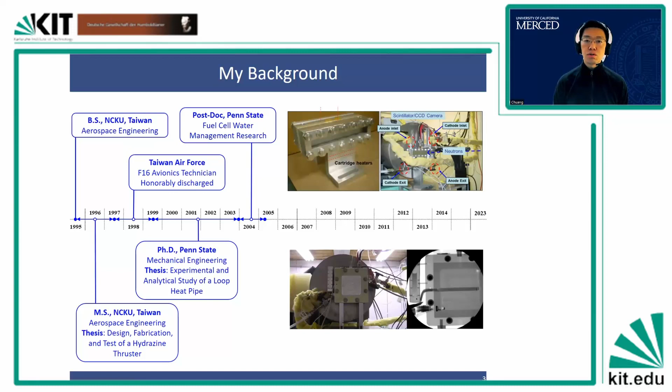On the bottom was with General Motors to study their fuel cell operation and to study their liquid water formation inside the metal casing, which is a single fuel cell. And so we started to understand that there are actually a lot of problems in fuel cell operation when it's related to two-phase flow.

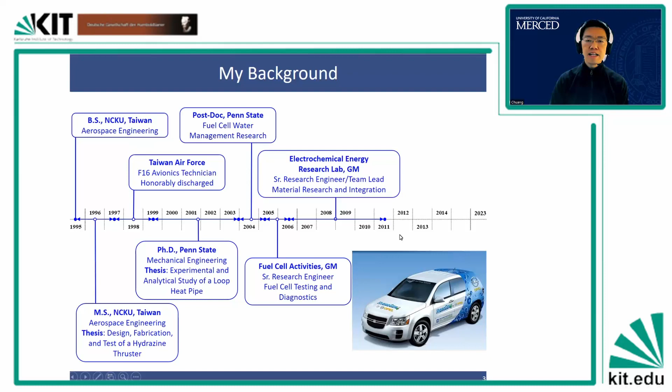So in 2004, 2005, I switched my career to General Motors. I started to work on the application or the research for fuel cell for cars, all the way until 2011. Then with that knowledge, with that foundation that I established, I switched gear to become a professor.

I first went back to Taiwan to be a professor for 1 year, and then came back to Purdue University before I finally joined UC Merced in 2014. So this is my 9th year here at UC Merced.

So I'm going to switch gears a little bit to start talking about hydrogen and fuel cells. I'm assuming some of you are in the area of fuel cell and electrochemistry research like Professor Zeis, but maybe not all of you are. So I structured today's talk with a bit of overview introduction, but also including a lot of in-depth technical content as well.

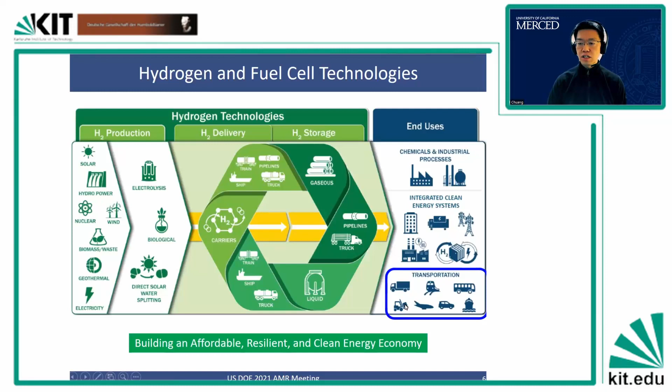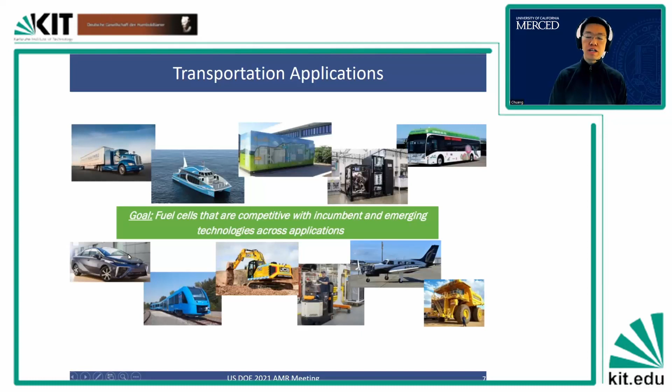During my time at General Motors, I was mostly focusing on passenger cars. Now I have a bit more focus on, for example, hydrogen trucks and other different applications. These are the different transportation tools we have, but my focus in my early years was mostly on passenger cars, and that's the application of the low temperature PEM fuel cell.

So I'm going to very briefly talk about these activities that I did with many of my colleagues at General Motors, really trying to develop fuel cell for passenger cars. If you take a look at this engine here, this is literally a fuel cell engine housing a fuel cell stack. It has zero emission, zero petroleum because we apply hydrogen, and hopefully this will be green hydrogen.

Compared to the internal combustion engine, it's much more efficient. There are fewer moving parts, also long range. It's very efficient, performance is very well, it can start under cold or hot operating conditions. It can be used for a small passenger car, can also be used for a large SUV or minivan. It has a lot of synergy with renewable energy sources. I have been working on this technology since 2003, 2004.

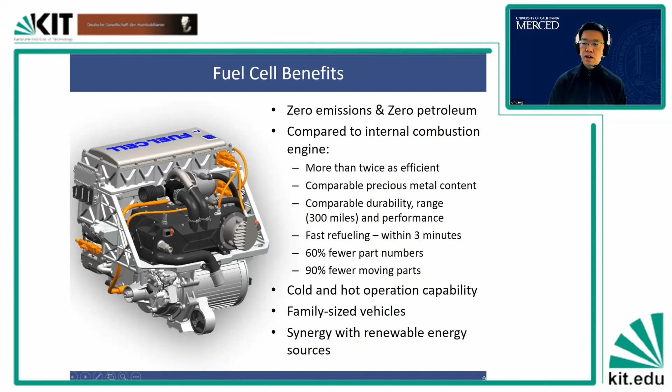When we apply a fuel cell in an automotive or transportation application, there are in general 4 different systems. The first system is related to the storage of hydrogen, referred to as the anode hydrogen storage system. The second system is the fuel cell stack, which is responsible for converting hydrogen into electricity. Through the process, because it produces heat, we need a radiator to continuously remove heat away from the fuel cell stack.

We also require an oxidizer. When hydrogen and oxygen combine, it generates heat and water along the process, and generates a lot of electricity to drive our power electronics for our powertrain. So this overall propulsion system can be used for passenger cars, trucks, and different types of transportation tools.

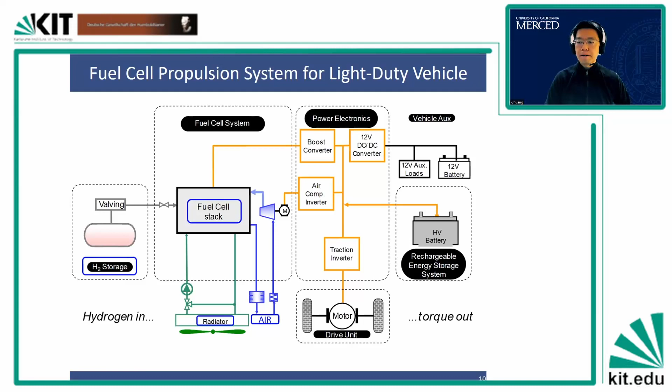A very general and quick introduction of a fuel cell, or low temperature PEM fuel cell. You have the cathode side, which is responsible for the reduction reaction, referred to as oxygen reduction. Oxygen combines with proton and electron to produce water. Later in my talk, I'll discuss why water is actually critical in this situation.

On the anode side is where hydrogen is split into protons and electrons. Through this carefully designed electrochemical process, we are able to generate electricity. We use this electricity to power cars and different applications. And so there are different components inside.

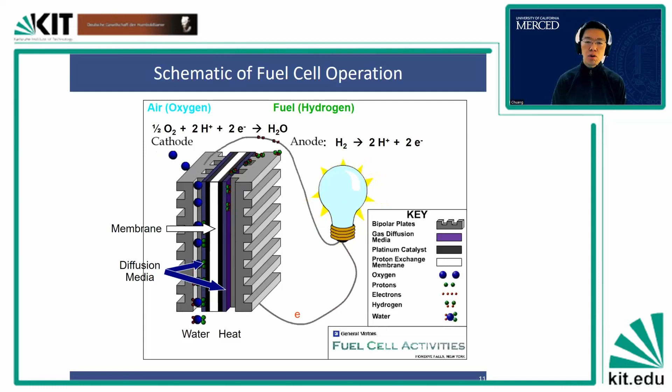Besides the flow, you can see the flow channel guiding the oxygen or air flow on the cathode side, and the hydrogen flow on the anode side. Within the cell, there are what we refer to as soft goods, which include membrane, electrode, and gas diffusion media. I'll blow them up to show you what they look like here.

If you look inside the center of this fuel cell, on the right-hand side is your anode side where hydrogen comes in, diffuses through the gas diffusion layer, and has hydrogen oxidation reaction at the catalyst layer. The proton then moves through the membrane and combines with oxygen to generate water.

What's interesting is if you take a look at this, I show this as a fuel cell transport study. As Professor Zeis was saying, a lot of my interest was related to transport phenomena, phase change, two-phase transport flow. If you look at this figure, there are many complicated physics: proton transport, electron transport, hydrogen and oxygen gas transport. Then, because fuel cells generate heat, there's heat transport together.

In order to have very good performance, one key component is to be able to compress the cell, so you enable electron transport through different layers. Later on, we are going to talk about how important these transport phenomena are for optimizing fuel cell operation or fuel cell durability.

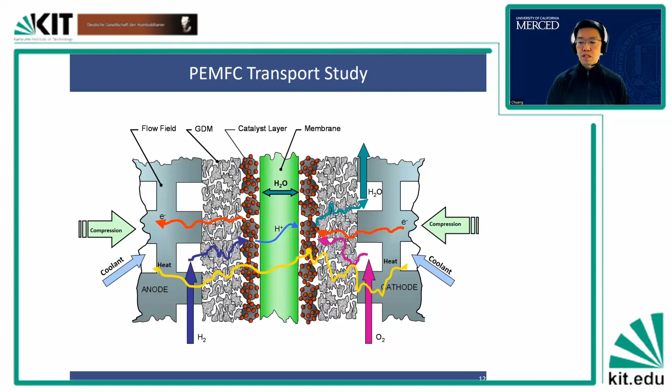My first project at General Motors was to study transport media, because of my background in two-phase transport in media using neutron radiography. When I first started at General Motors, I was given the task to study the gas diffusion layer, which stands for GDL, and the microporous layer, which stands for MPL.

I use this to show you the multi-scale transport nature, because the gas diffusion layer is actually made of carbon fibers, with a carbon fiber size of about 7 to 10 microns each. When you stack them together, the pore size is about 200 microns.

If you take a look at this microporous layer, which is a layer on top of the gas diffusion layer, it consists of carbon particles mixed with hydrophobic agents like PTFE. There are large cracks on top of it, but the pore structure within these carbon particles is roughly about 50 nanometers.

My first task at General Motors was to study these materials and how we could optimize them to enhance either performance or durability, or to remove issues with generated liquid water. The first step I did was look into the process, design, and material of this baseline material, referred to as diffusion media.

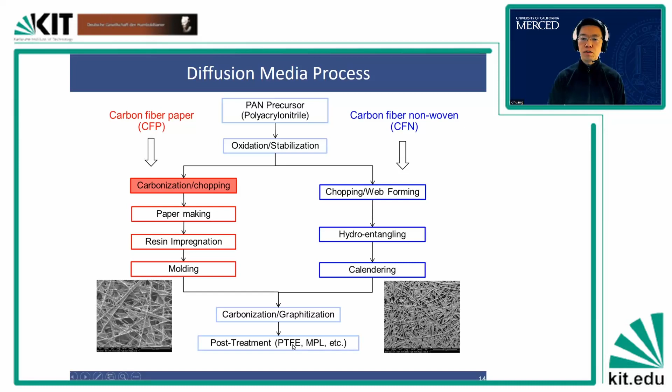After this, there is usually graphitization or carbonization to enhance transport properties, and post-treatment for microporous layer coating or other forms of coating. While at General Motors, together with my colleagues, we developed different tools to characterize the properties of the gas diffusion layer.

One area was to study electrical transport, both in-plane and through-plane. Then there's thermal transport, again both in-plane and through-plane. We were able to put together a thermal transport model to predict temperature within a fuel cell. We also developed tools to characterize gas transport for hydrogen and oxygen transport, including a tool called limiting current, which I'll introduce later, a diagnostic tool to characterize the features of hydrogen and oxygen transport within a fuel cell.

Last but not least is mechanical transport. As I said, the fuel cell requires strong compression to keep all the cells in good contact and to transport heat and electricity away from the cell. So the mechanical property of the diffusion media, which acts as a spring inside the cell, is extremely critical. We developed tools and methods to study the bending, compressibility, and shear modulus of the gas diffusion media, and developed models to predict what the deformation looks like inside the fuel cell when compressed. Those tools were developed with my colleagues at General Motors.

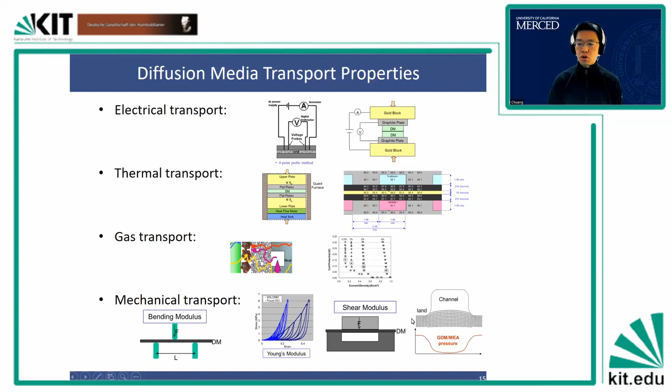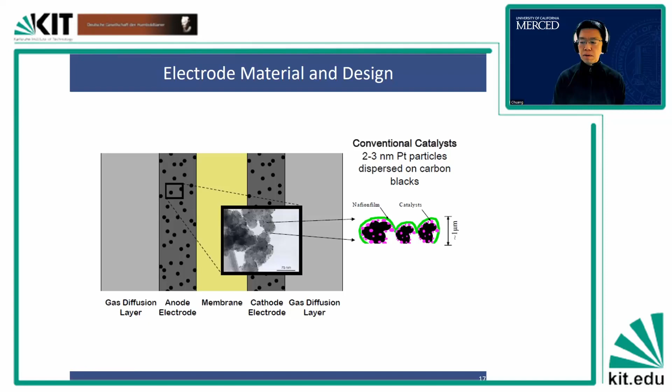Along the process, I talk about models and being able to predict transport effects. I also was involved with fuel cell models that predict fuel cell performance inside a cell. This is referred to as a 1D down-the-channel model, which is a great tool that captures the physics. I'll talk a little more about this in later slides.

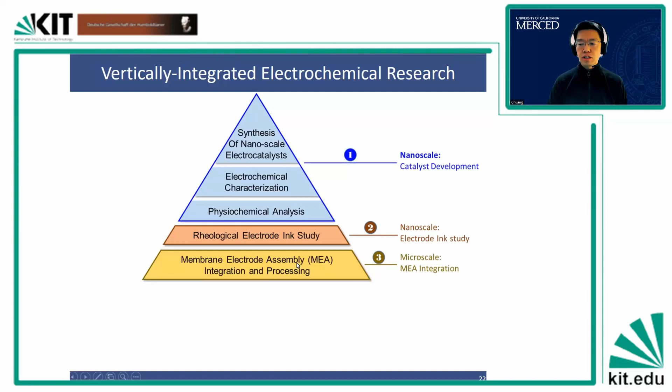The last but not least scale relates to full cell testing, characterization, and simulation. So these are four different vertically integrated research scales. You can see that from level 1 to level 4, it goes from nanometer scale all the way up to millimeter scale. If you consider the scale of the channel and the stack, it can actually go up to centimeter or meter scale.

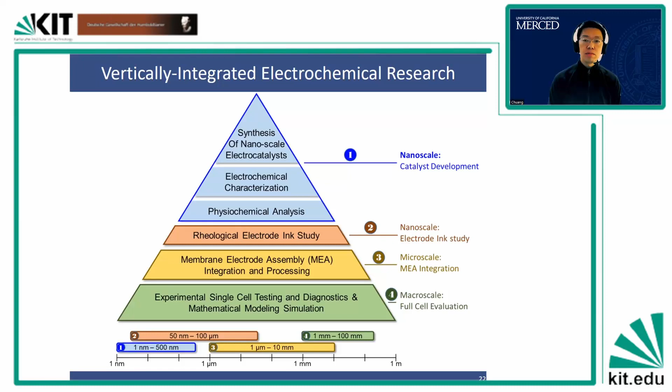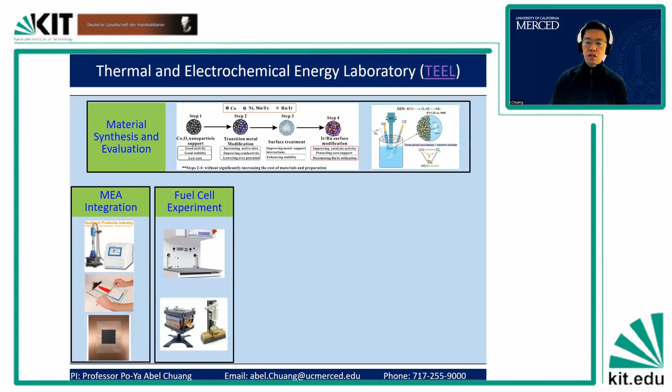Within this strategic plan, I structured the lab activities around these focuses: first, material synthesis; second, material integration or MEA integration; third, fuel cell experiments; fourth, fuel cell diagnostics; fifth, fuel cell modeling; and lastly, system integration. We don't do system integration ourselves at UC Merced, but rather collaborate with suppliers and vendors on that. Our research mainly focuses on the first five areas.

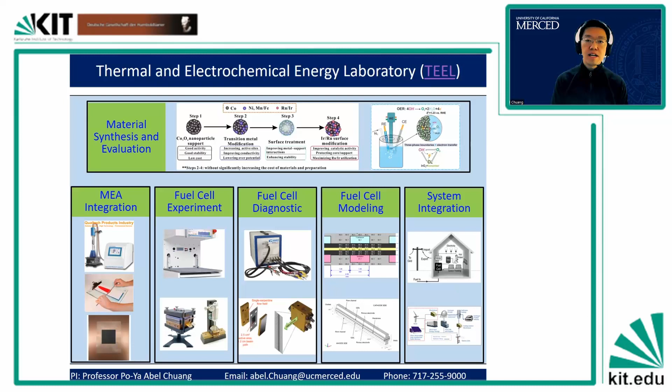Material synthesis, integration of catalyst layer or MEA, performing fuel cell experiments and diagnostics, and then based on those results, developing fundamental understanding through fuel cell modeling. In the next ten slides, I'll introduce each area very briefly, without going into too much detail since these are relatively broad research topics. I just want to give you an idea of what we're doing in the lab, so we can have follow-up discussion to dig deeper into each area.

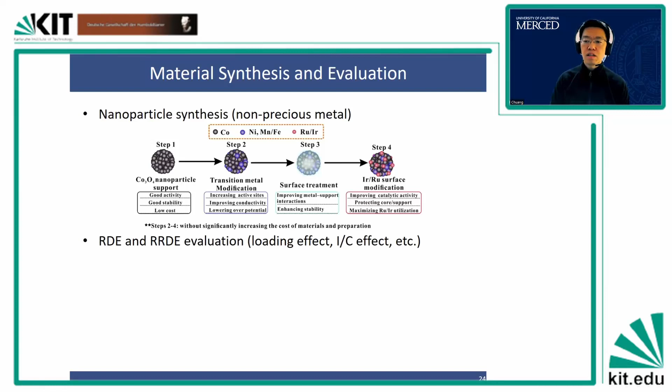The first step is making nanoparticles, synthesizing different catalysts through different reactions or activities. We have different tools for making them: hydrothermal tools, flux tools, and atom fusion tools, which let us make materials depending on their properties or on the precursor.

After that, we perform RDE or RRDE evaluation to understand their fundamental intrinsic properties related to the Tafel slope and specific activity of the material, through cyclic voltammetry, impedance measurement, or linear sweep voltammetry analysis. This is an illustration of a three-electrode system.

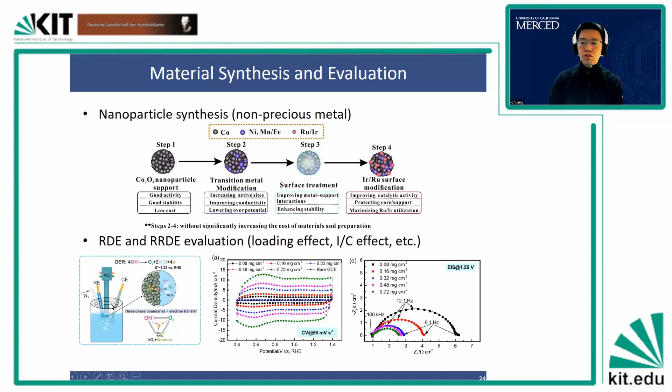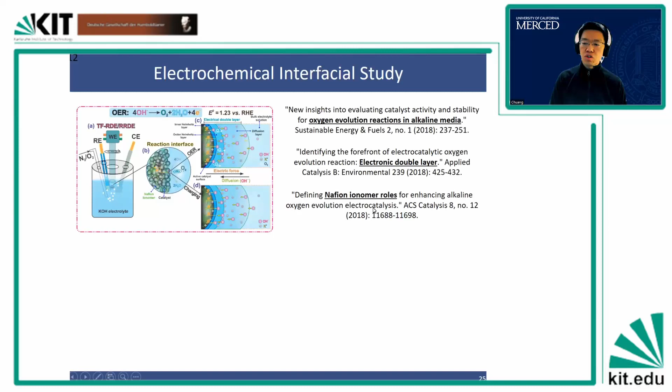Through this process, we were able to do quite a bit of fundamental research. We applied the study to catalysts for oxygen evolution reaction in alkaline media, and also in acidic media, studying the role of Nafion and its interaction. We also applied these tools to nickel carbon-based materials to study urea oxidation reaction and catalytic activity.

We will continue to work in this area to develop catalysts through different types of electrochemical research. The second area relates to MEA design, processing, and integration. As I explained earlier, this continues from my activities at General Motors on how to integrate catalysts and make a highly efficient membrane electrode assembly.

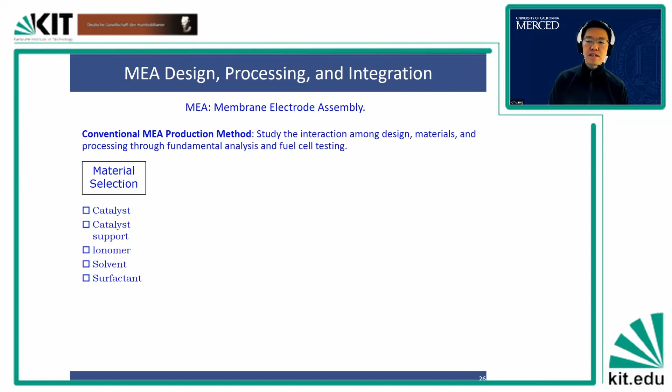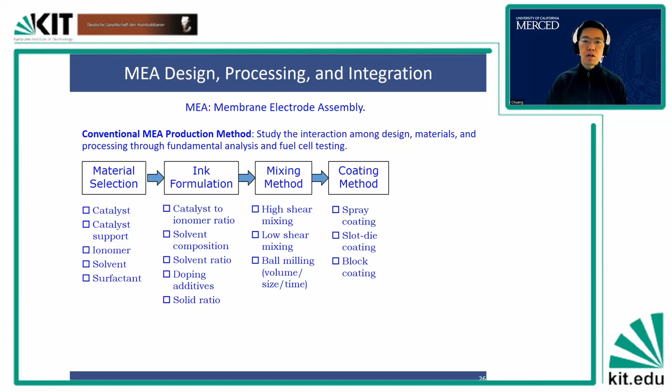The process starts from selecting materials and then making an ink—coming up with different ink recipes, mixing the ink homogeneously, and then applying the ink through thin film coating, either onto a decal or onto a gas diffusion layer.

And through those, we were able to integrate them through different architectures. I explained to you earlier that we can either make this as a CCM or a CCDM architecture. They have different advantages and disadvantages within different architecture.

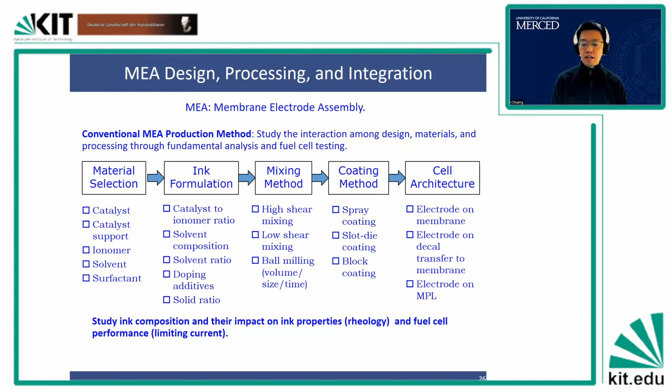Some of this work, as you can see here, is very interesting but very developmental. So besides some fundamental work, we also did this developmental ink optimization process. But instead of just trial and error, we wanted to study the ink to understand its properties and how the final microstructure of the catalyst layer looks. Through that, we employ this ink mixing and coating process, demonstrated here, referred to as the membrane electrode assembly integration.

We can do this with decal transfer, or we can also coat a GDE through the hot press process, different processes that we integrate. With that, we were able to test a full fuel cell to diagnose the properties and performance of a fuel cell.

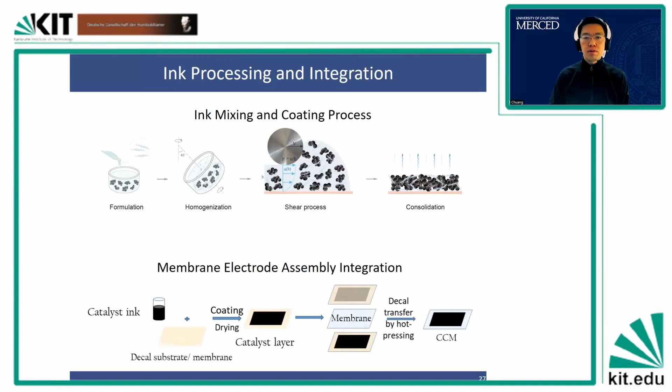But as I said, instead of just doing trial and error, we make a recipe, then we make the MEA, we test the MEA. Instead of going from trial and error, making one and testing to know if it's good or bad, we actually employ the tool called rheology.

So we study the rheological behavior of the catalyst ink to understand when it is under shear or before shear, what does the microstructure look like?

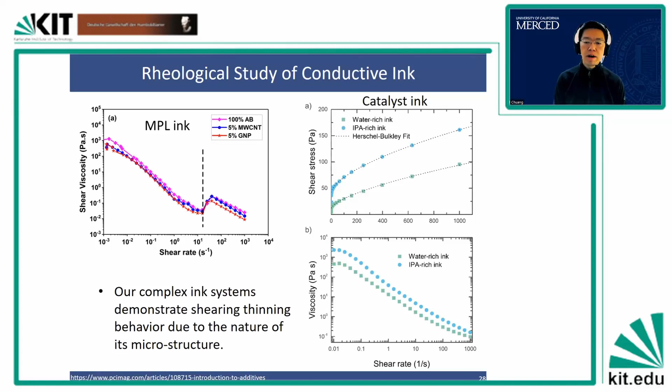But to understand the microstructure a little bit more, we also study this dynamic measurement. Within this dynamic measurement, we have different shear steps, a 3-step process called three-interval thixotropy test.

First step is low shear, then you shear at a very high shear rate, and the viscosity will drop. After that, we let the viscosity recover itself to understand the time-dependent measurement behavior.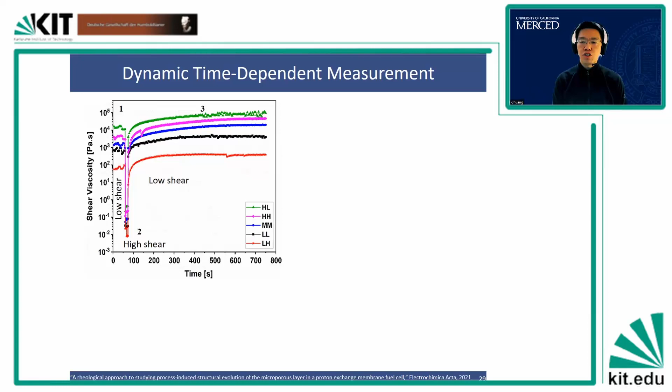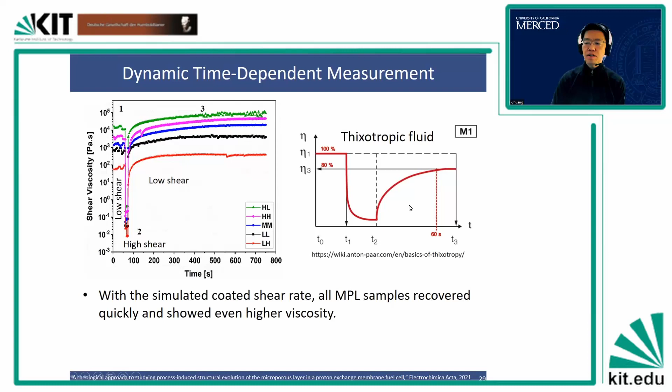With this 3-phase rebuild, we were able to study whether the ink actually has thixotropic behavior, or whether this ink on the left exhibits rheopectic behavior. Through the study, we were able to propose different microstructures, in this case, for the microporous layer, looking at what happened before the intact structure, before shear, and during the shear process.

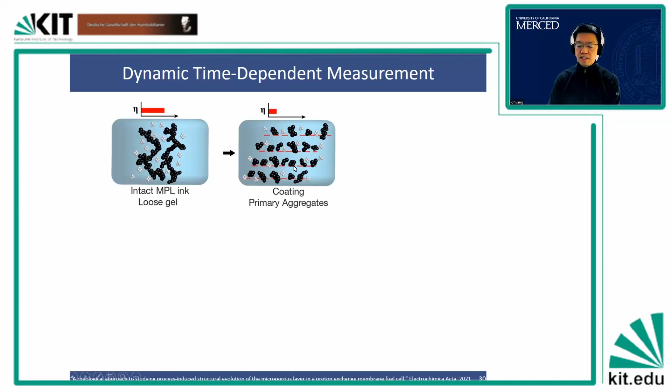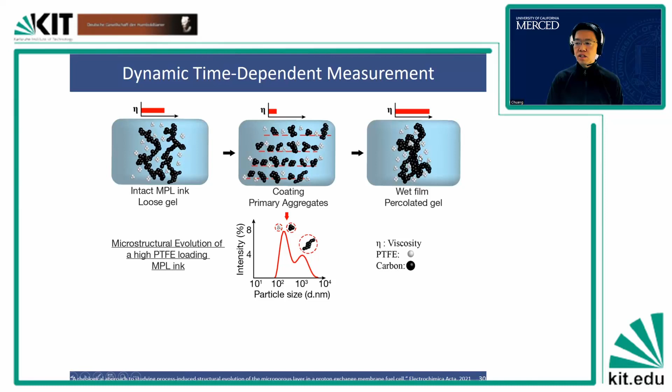Through the process, we also investigate the primary particles to understand their particle size distribution. At the end, after they recover, they actually develop a stronger structural behavior compared to the original behavior.

So this rheological study was able to help us understand potentially what the microstructure of these primary particles looks like.

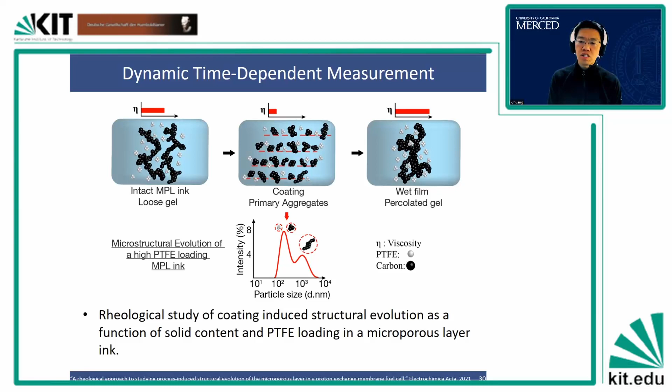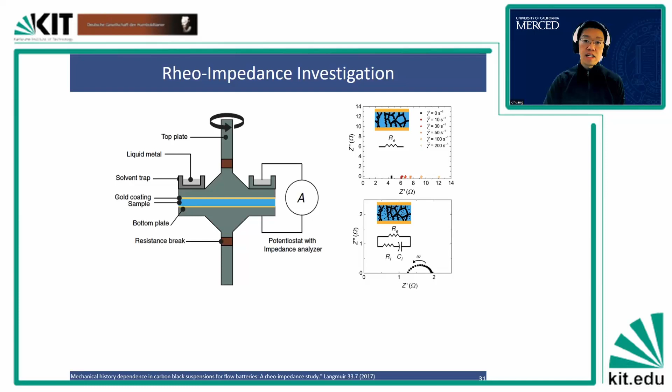Recently, we expanded this study to not only study rheology, but also study impedance in situ or simultaneously. We developed and modified our tools to implement this rheo-impedance investigation to study the ink, because we know all of our ink has ionic conductivity and also electrical conductivity. Through this study, our goal is to understand what the electrical conductive microstructure looks like, and what the ionic microstructure potentially looks like, and their interactions by probing them at different conditions.

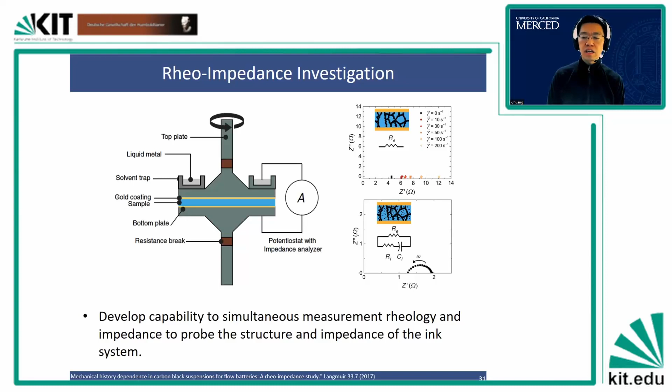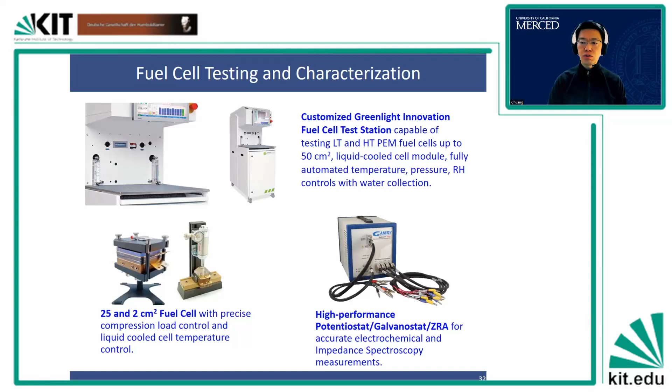So these are the tools that we use to study our microporous layer and catalyst layer ink. A few more slides: we want to show you that we did quite a bit of fuel cell testing and characterization through the fuel cell test station tools that we have, and we also perform fuel cell diagnostics that we continue to establish through the process.

One of the tools is called limiting current study, and I'm going to talk a little bit more about this tool later.

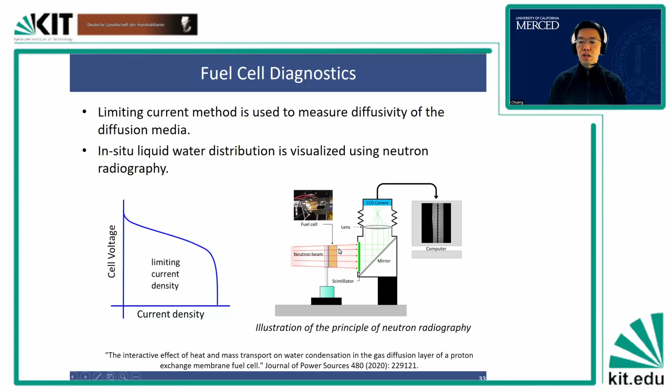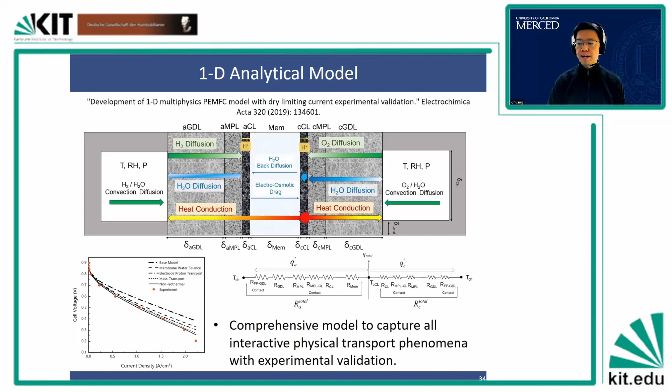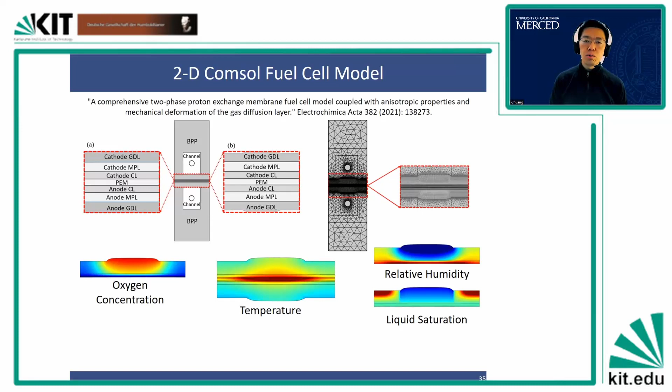We also apply this into a 2D or 3D COMSOL computational model to study local distribution. Instead of 1D, this was able to provide a different type of local properties in terms of mechanical properties and transport properties, and we were able to study them to understand the non-uniformity within the cell. We continue to develop these tools within our lab.

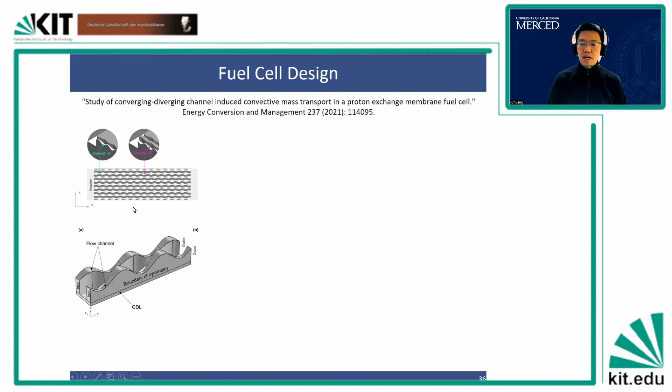Last but not least, there are different types of fuel cell designs that we implement and enhance. For example, this is a 3D channel model. We designed and manufactured a very complicated 3D channel geometry, which looks like a convergent-divergent nozzle throughout the whole process. We performed fuel cell testing as well as neutron radiography to validate its water distribution and performance, and the 3D nozzle has shown superior performance over conventional flow channel designs.

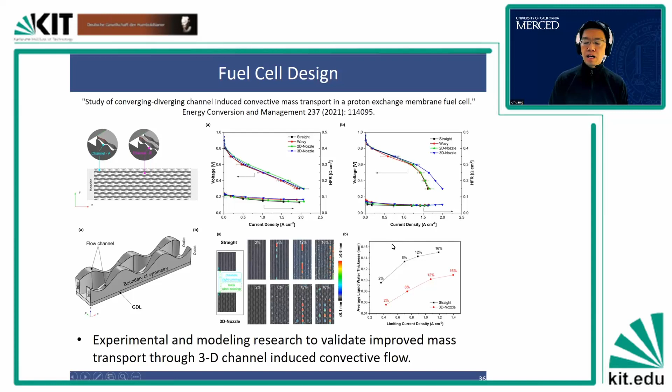So those are basically all the areas of research that we developed or do at UC Merced. Within the next 5 minutes, I'm going to home in on one spotlight research project that demonstrates an approach that we used to solve a very complicated engineering problem through fundamental research.

I'm going to zoom in mostly on the interactive transport within the fuel cell, and this whole series of research that we have developed. This entire research spans more than 10 years of my research time, studied during my time at General Motors, all the way up to today. You can see this problem solving loop here.

The first step is identify the problem. Then you get a better understanding of the problem, and then you test the idea - you test the hypothesis to see if this is actually solving, or is this actually the root cause of the problem. Then you evaluate the results and come back in this loop. I want to use this example to share that we have done probably 20, 30, 50 times of this iteration loop throughout the process of solving the interactive transport study in a PEM fuel cell. Compared to 10, 15 years ago, I feel like we have come a long way.

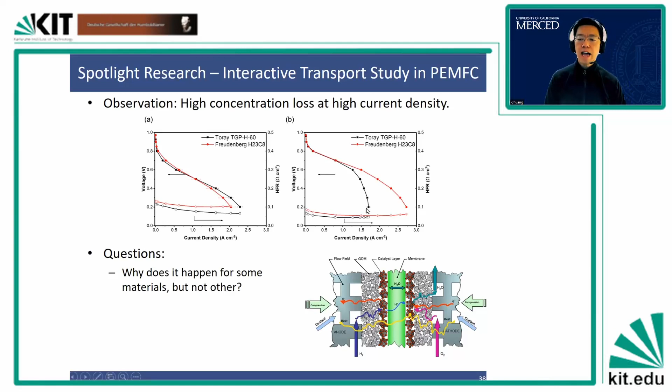During that time, we had a few questions. We were wondering why there is high concentration loss, a high loss at high current density. When we go up to higher and higher current density, this loss shows up very quickly. We wondered why this happened, and this only happens for some materials, but not others.

The second question is, are there liquid water condensation inside the cell? Is that the root cause of the problem? We already established the answer for that early on. But then a more fundamental question is, where is the liquid water? And what are the governing parameters for this flooding behavior, this flooding phenomena? What can we do to either prevent this from happening or mitigate it? This will be either a material solution or an engineering design solution.

So we have this series of problems that we identified, and these are the steps. I'm going to list 7 steps that we did. At the very beginning, these steps were collaborative work with my colleagues at General Motors, and then later on we continued to develop them within our lab at UC Merced.

The first step is that we identify and fabricate materials with extreme properties. There are two different ways to produce this gas diffusion layer. On the left-hand side is the wet lay process, on the right-hand side is the dry lay process. For the wet lay process, because it has this chemical resin, in order to carbonize it, this material is usually graphitized at a much higher temperature, roughly about 2000 degrees C. Some can be as high as 2400 degrees Celsius.

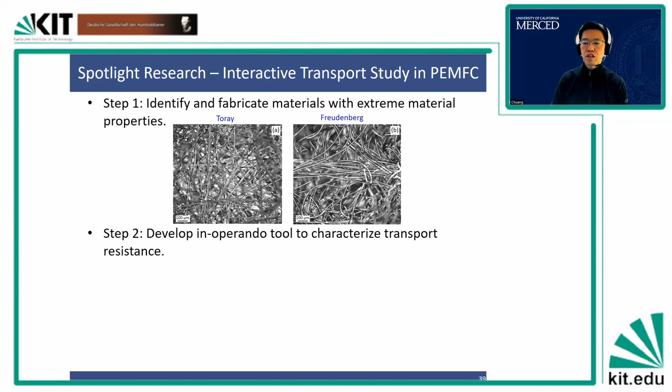We identify them because we know with these properties, we have a better idea to maximize the signal that we study. The second step is that we develop an in situ or in operando tool to characterize transport resistance, referred to as the limiting current process.

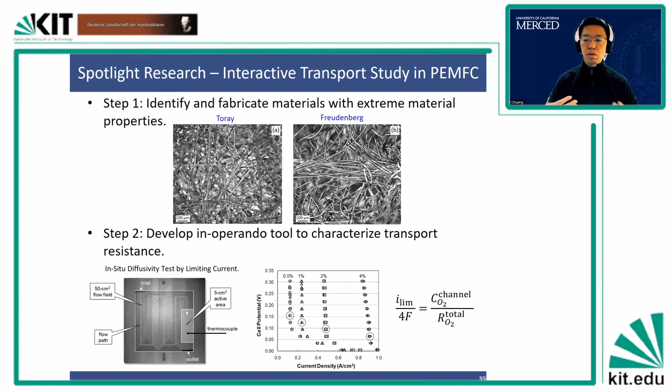As you can see, when you double the concentration, your limiting current also doubles. So you go from 0.5 to 1, 1 to 2, 2 to 4. You can see that this limiting current doubles as a function of concentration. So you know that the resistance of these materials is a constant. We developed this tool, which is very useful in characterizing transport properties, so we apply them in a real cell.

Step 3, we identify the transport limitation. So we apply the tools on this material that has Toray material. On the x-axis here, and on the y-axis is the transport resistance, the oxygen transport resistance. As you can see, this resistance is actually not a constant - when the current density increases, the transport resistance also increases. This is a sign of liquid water condensation.

If you take a look at this, the Freudenberg doesn't show a drastic transition or dramatic increase compared to the one on the left. So we observe this fundamental difference. We developed the tool, characterized this material, and found out that these actually have very different behavior.

This is actually responsible for the difference in performance. For the Toray, at high current density you have very high oxygen transport resistance. Low current density is good, but high is bad. That's why you see this very dramatic drop in performance. On the other hand, for Freudenberg, the increase of transport resistance is not so high, so it continues to be able to run at a high current density.

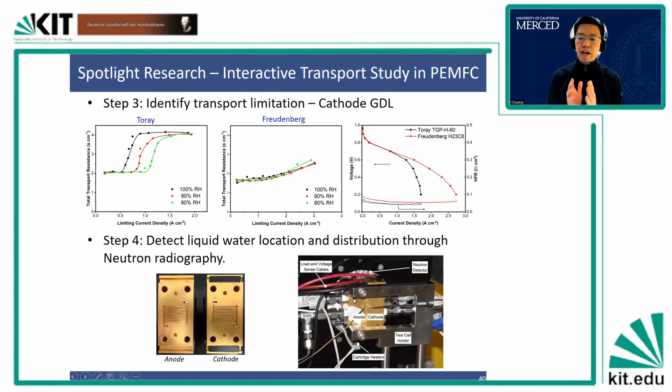So we developed this, we actually made this cell. This was done when I was at UC Merced. We put it into the neutron radiography to characterize its water transport. This tool is capable of identifying liquid water at a very fine scale, so we were able to look at both Toray and Freudenberg material.

This case is a low current density. Blue means liquid water, black means there's no liquid water. You can see the MEA membrane has a little bit of water, but the anode and cathode gas diffusion media for both materials do not have liquid water.

But when we increase the current density, you can quickly see that for the Toray material, the anode diffusion media is still no problem, relatively dry. But on the cathode, which is on the bottom side, the cathode diffusion media is pretty much filled with liquid water everywhere. For Freudenberg material, the cathode diffusion media has some water here, no water here, some water here, no water here.

This actually corresponds to the compression land and the channel. Oxygen is fed in the channel, so there's no problem for oxygen to diffuse into the catalyst layer. But for the Toray material, you can see this layer is all wet, and this water exists within the entire layer.

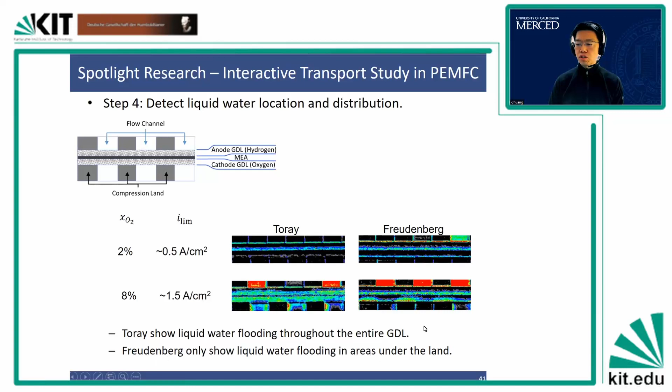For Freudenberg, the distribution of water is very different. It shows that Toray shows flooding on the cathode diffusion media throughout, but Freudenberg shows only a limited area. This observation agrees perfectly with our characterization through the transport study.

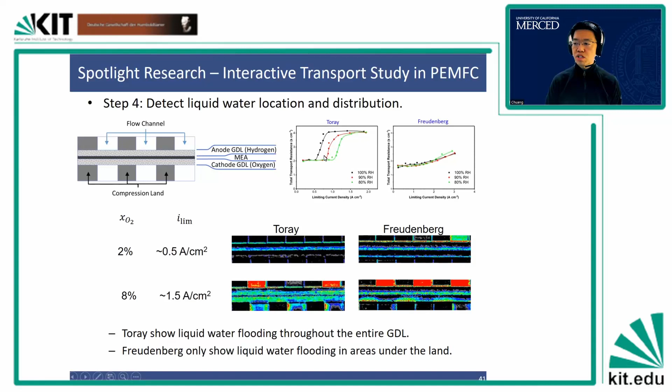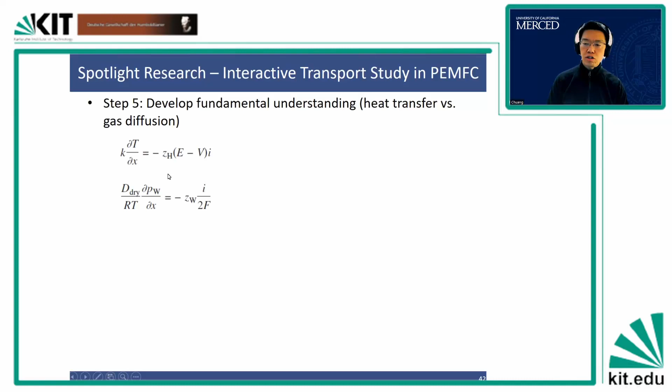Now the fifth step is to develop the fundamental understanding of the feature. We actually look into the physics of heat transport and gas transport. I'm not going to go through this in detail - we published all this work, so feel free to look into it if you're interested.

Because of their thermal conductivity and transport properties, there are two different phenomena. Freudenberg looks like the blue line, where the saturated pressure, the dotted line, is almost always above the water vapor pressure. So there will be no condensation, but there will be initiation of condensation on the right-hand side, away from the catalyst layer.

But for the red, which is Toray, it's the opposite. You have the saturated pressure here on the dotted line, but the water pressure is the solid red line. When the water pressure is above the saturation pressure, you start to condense, and it condenses very quickly near the catalyst layer side.

Once we develop this fundamental understanding, we identify governing properties of the gas diffusion layer - these are thermal conductivity and gas diffusivity. Thermal conductivity is K, gas diffusivity can be represented as tortuosity divided by porosity.

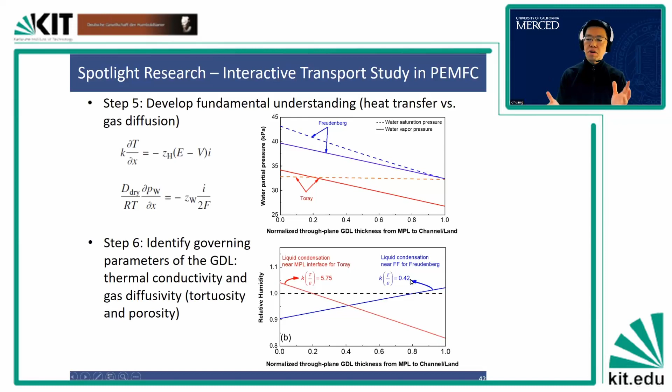Through this 7-step process, my goal is to demonstrate that even though it ranged for more than 10 years, through this process we were able to develop fundamental understanding, solve the problems, identify the governing material properties, and based on that understanding, design future materials that can enhance our performance in a fuel cell.

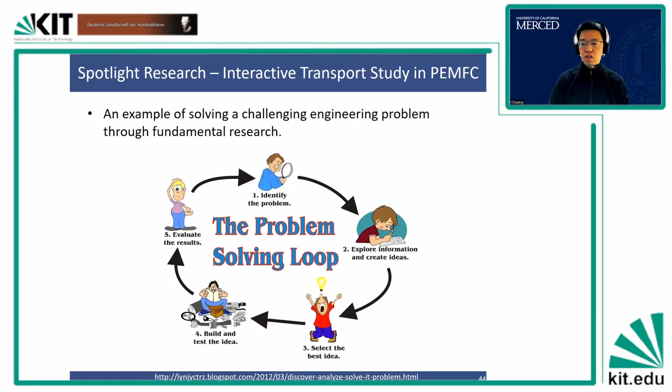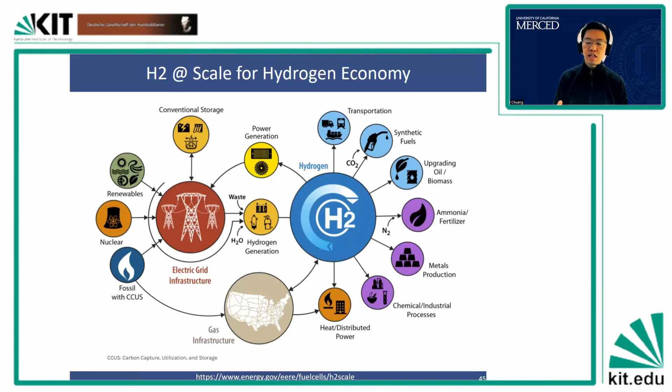So I'm going to wrap up my talk here very quickly. Hydrogen at scale is a big research topic. Hydrogen economy is big, so there's a lot of development in this area. Within that, our lab in the past 5 years has expanded our research scope. The fundamentals are still based on transport, material, and electrochemistry. But we expanded into a PEM electrolysis cell to generate hydrogen by splitting water. We also expanded into alkaline fuel cell and alkaline electrolysis cell. We also expanded to solid oxide fuel cell study, and lastly expanded to CO2 electrolysis cell.

What I want to point out is that all the physics in terms of electrochemistry, transport, these properties are very similar to the PEM fuel cell where we developed a very strong, significant fundamental understanding. So we apply those basic principles, basic problem-solving strategies to try to expand our research in this area.

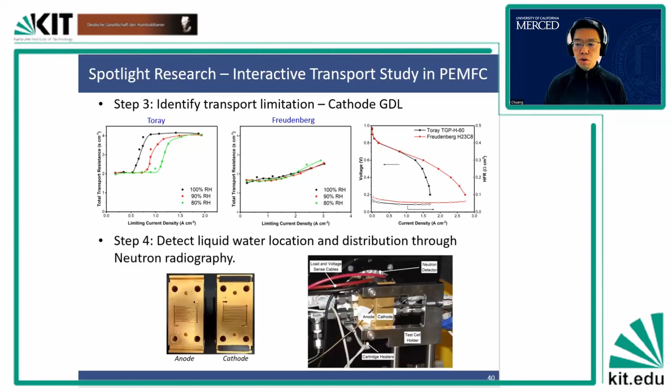Thank you so much for the question. I wanted to point out one of the characterization tools that we developed, which we also recently published. If you take a look at these features, this is the characterization for, in this case, the porous media before and after liquid water saturation. This material we structured here is specially designed with hydrophobic properties. As the researcher mentioned, hydrophobicity in this cell actually has a significant impact. One of our studies shows that with different levels of hydrophobicity, or even no hydrophobicity, these transport properties do not reach a plateau. I can show you this transition here.

These are the materials. You can see that it actually goes from dry to wet and reaches a plateau. If you have low hydrophobicity, or if you remove your microporous layer, this transition will actually shoot up all the way rather than reaching a plateau. So yes, indeed, hydrophobicity is a critical factor in determining the liquid water condensation and determining fuel cell performance in this case. Thank you so much, Professor.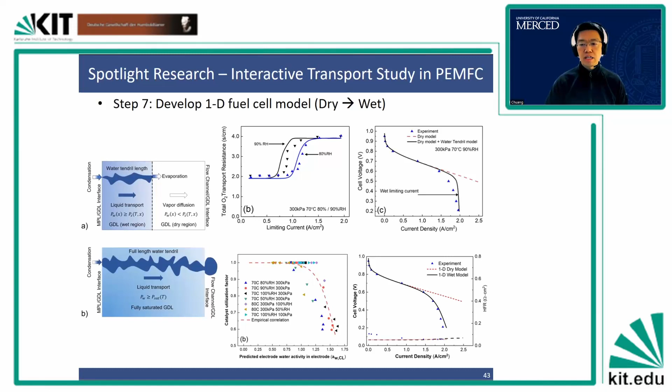This material, when we manufacture it, the feature you see here ranges between about 330 micron to about 660 micron. We use a resin impregnated graphite plate, and we use a milling process, a machining process to do this. But you ask a critical question.

Right now we have an active project on additive manufacturing, 3D printing, and lithography to actually design a pattern feature to be able to control transport properties. This is something we are actively doing now. We don't have significant results in this area yet, but it's an area we are actively pursuing.

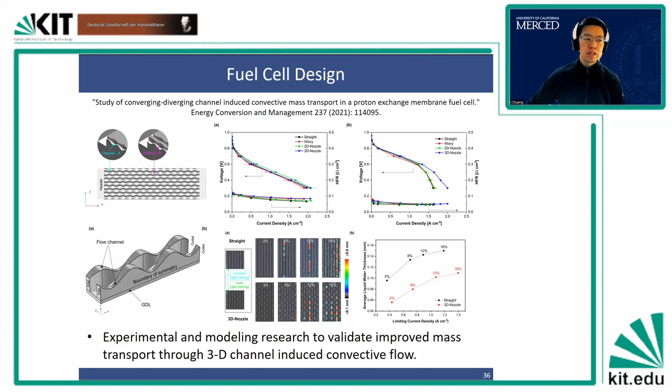The reason we expanded into the alkaline environment is because in alkaline media, oxygen reduction or oxygen evolution is easier to apply with non-noble catalysts. As Professor David Nevitt was saying, for non-precious metal, it's much easier to apply in alkaline media.

We actually apply this in alkaline oxygen evolution and also in alkaline oxygen reduction reaction. Some of the catalysts we developed for this nickel-based material, we also apply them into a hydrogen evolution study, so we have some preliminary results for that. If you're interested, we can certainly share those results with you later after this presentation.

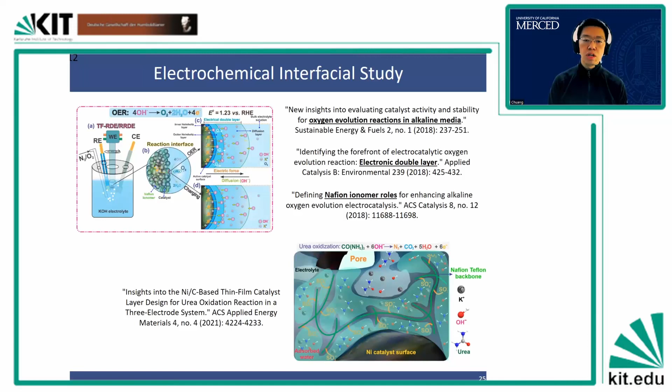When we run these two materials through a long life durability protocol testing for say 1,000 hours or 5,000 hours, does this trend continue? My honest and short answer is that we actually did not run both of them to long durability, but these two materials are for research purpose—we kind of specially designed them for their properties.

But for the material that we put in the fuel cell stack to run durability tests, those materials are typically very robust in terms of their performance under both dry and wet conditions. The failure modes we observe are either through membrane degradation—chemical degradation or membrane pinholes—or catalyst degradation, like loss of ECSA, loss of activity, platinum dissolution, or carbon corrosion. These are more significant issues in durability studies rather than the diffusion media, because we don't purposely put a diffusion media that will cause flooding and then run durability tests.

I mentioned earlier today that we are working on developing fuel cells for hydrogen trucks, and for hydrogen trucks these durability issues are critical. So the focus is more on membrane mechanical and chemical durability, and then catalyst layer degradation. Even though for the truck we were able to afford higher platinum loading, the platinum degradation is still an issue. Based on my experience, the level of degradation we saw previously was...

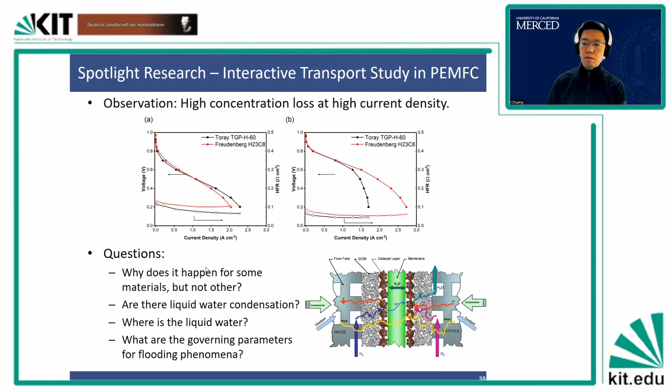When I said degradation, usually if you take a look at this chart, the onset of flooding and the level of flooding increased, but the trend still remains pretty good. Having said that, our ECSA loss and our membrane thinning are much more severe at that time. So that would be my experience. I don't know if there are other experts in this area who can comment on this.

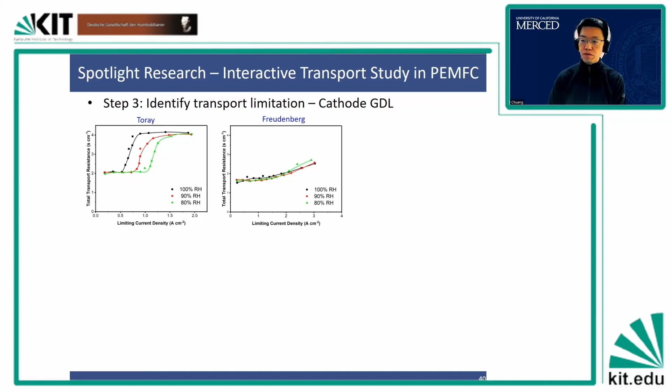On top of that, what's even more complicated is that there will be local transport resistance in the catalyst layer, which is referred to as related to flooding as well, which we actually observed. That was the work we did on this level of study, where different catalyst utilization is actually responsible for flooding as well, more related to the catalyst layer.

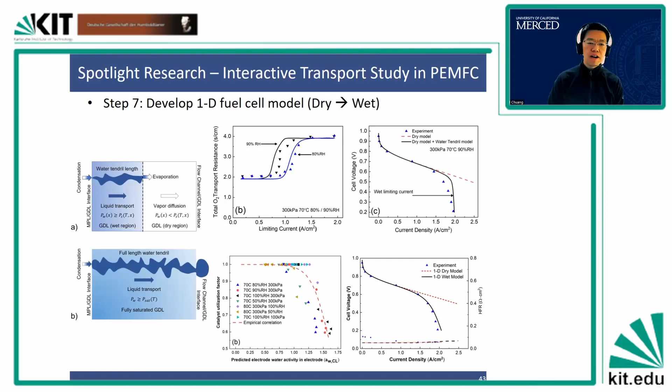So yes, you are absolutely correct. Before we get rid of PTFE, we probably have to find ways to modify our Nafion, because Nafion is modified PTFE and it's right next to the catalyst layer, so that is much more worrisome. PTFE inside the gas diffusion layer and microporous layer are a little bit farther away from the platinum carbon, so potentially they are not as detrimental. But the Nafion structure, PTFE structure, the sulfonic acid, fluorine—these are right inside the catalyst layer and probably have something we need to find ways to mitigate or modify first. If you have someone in the audience who is more material-oriented, who can modify carbon fiber and try to implement some variation of hydrophobicity, I think that would be an innovation.